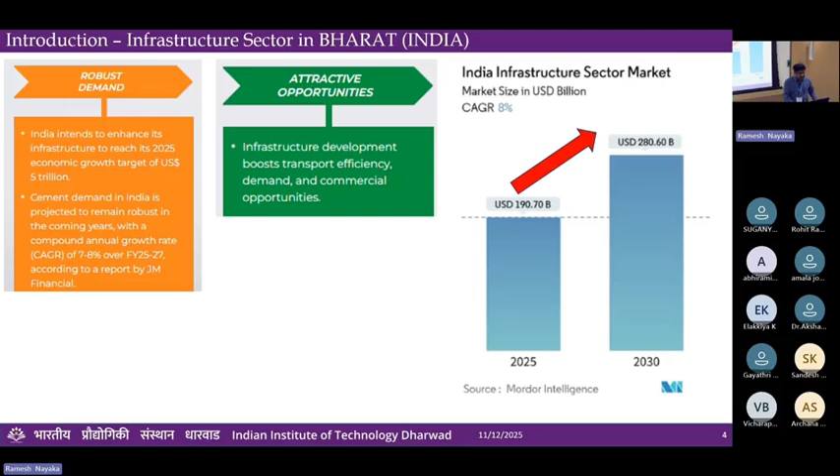Although the financial contribution or enhancement whichever is reserved, in order to meet that we need to have the kind of sources to build it. That is where it is reported by JM Financial that there are attractive opportunities. In order to build this, the government has just announced 3.1% of GDP to build the infrastructure.

So it is not just about reserving the financial support for building infrastructure, but on the other side, there are attractive opportunities to build the infrastructure, which could boost transport efficiency, essential for growth of any of our tier 1 cities, and also demand for commercial opportunities in tier 2 and tier 3 cities where we are looking for many commercial corridors.

For instance, if you talk about Mumbai-Pune, and Bangalore-Pune, and again we talk about Chennai-Bangalore, Hyderabad-Bangalore, there are many corridors which would be connecting or looking for commercial opportunities and need of this transport efficiency in order to connect business.

So that is the need again of infrastructure and policy support. As I mentioned about policy support, the union budget had reserved the fund, and likewise there is increasing investment. If you look at the other investors who would be investing in the infrastructure, their investment is increasing year over year.

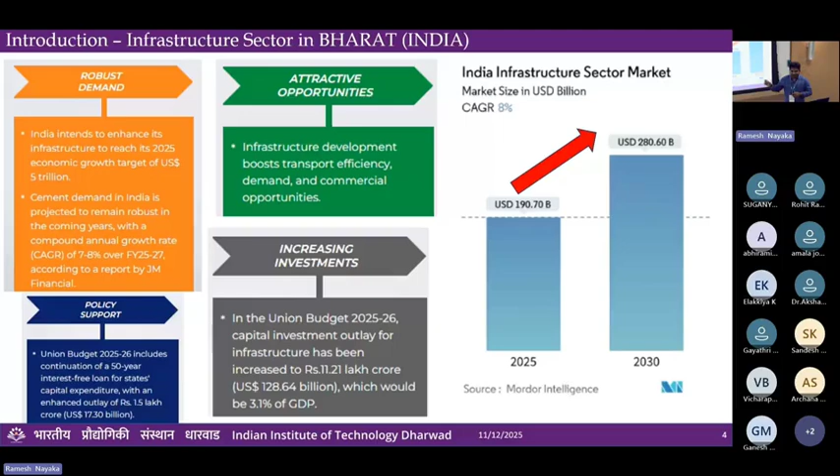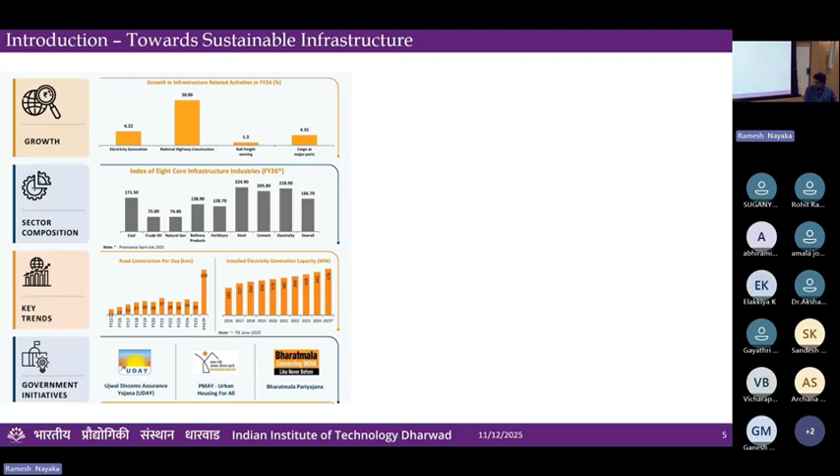So you'd see the trend showing road construction per day. Every day we would be noting, understanding the growth or trend going on in terms of construction. These are a couple of government initiatives also supporting meeting the infrastructure demand.

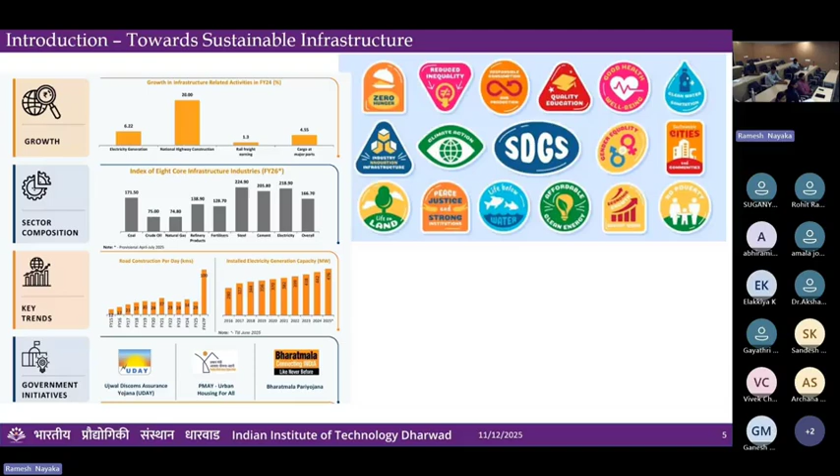On the contrary side, it is also important to understand sustainability. If you're talking about the sustainable development goals, these were established in 2016 from the Paris Summit. In the Paris Summit, 17 sustainable development goals were defined, and 192 nations are working towards achieving these sustainable development goals.

The important role in achieving the sustainable development goals, out of the 17 goals, you can see industry innovation and infrastructure. This is one area where we can think about contributing directly or indirectly. We can also contribute to sustainable cities, acting upon our implementation or looking at alternative sources for any demand, whether it's cement or any natural resources we traditionally use as construction materials, so we can overcome this.

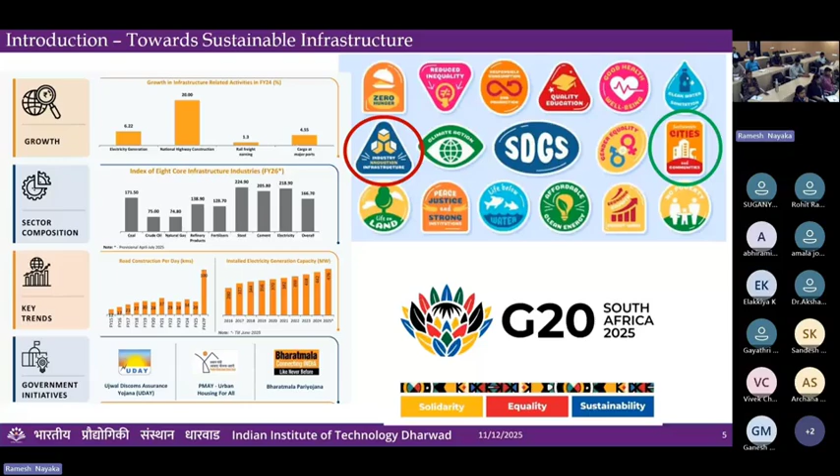This was again revisited and recited about achieving the sustainable development goals in G20, held at South Africa in 2025, where sustainability is one of the three pillars. We have other components, but as far as this theme is concerned, we will be focusing on sustainability. In this line, our research center would be working on most of the emerging technologies and also sustainable innovative materials.

One such thematic research I would like to present through today's session is introducing the current ongoing research on construction waste, converting those waste materials into innovative materials, and finally adapting the emerging technology of 3D printing to build 3D printable structures.

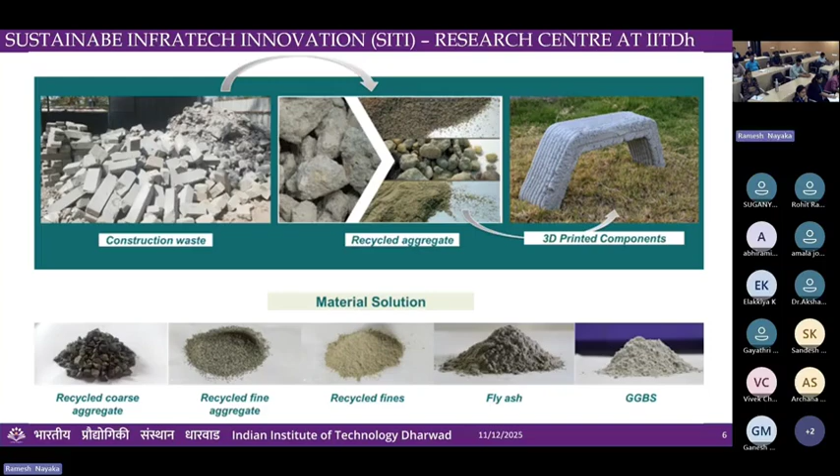Similarly, it is there from our roots about using our indigenous materials. Introducing these indigenous materials into 3D printing technology is another vertical we would be discussing as part of today's session.

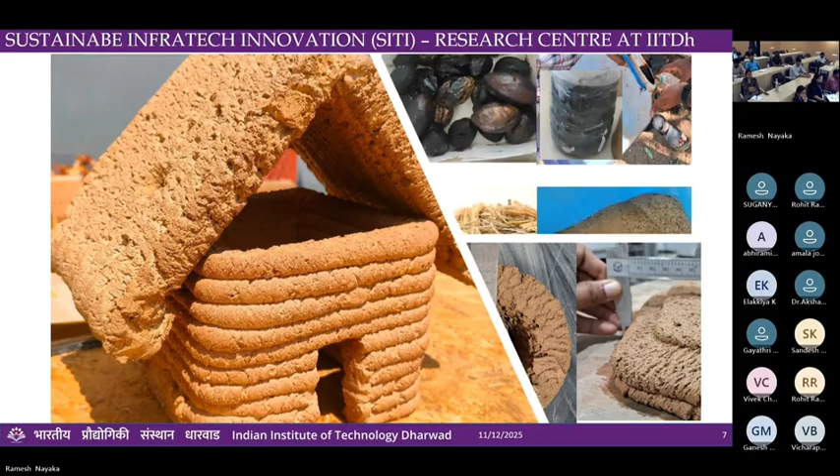So this is about the material. When you look at emerging technology, I just wanted to start with the introduction - how this technology is different from the existing technology, the so-called traditional construction techniques, our traditional construction practices. So what are the challenges we have in current traditional construction practices?

Can anybody name a few challenges we have been facing? Let's say our demand is increasing 8% year over year, that is a compounded annual growth rate. So what are the challenges we are facing? Why aren't we meeting the required demand?

Depleting natural resources, quality issues. Pardon? Time consumption for construction.

Yes, so again, the project time is the most important attribute towards meeting the demand. Anything else? Economic feasibility - when we talk about time, when you want to cut down the time, it comes with additional cost. So whether it is economically feasible or not is also important, and that is one of the current challenges in existing practices. Any other points you'd like to add?

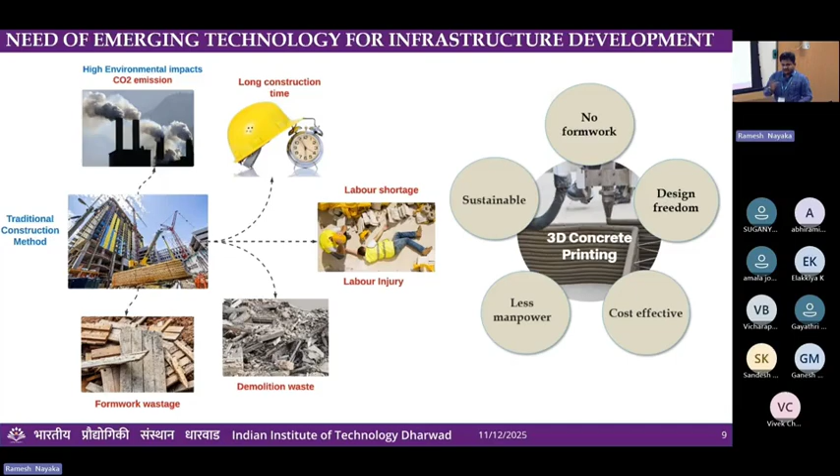I hope all of you know about 3D printing technology. By definition, this is an innovative construction technology which gives design freedom. Most of our typical construction practices are regular shapes, so if you want design freedom in construction, this is the most efficient and suitable technology using the method called 3D printing. This gives design freedom, faster construction rate, less waste, and also it would be cost effective in overall project cost.

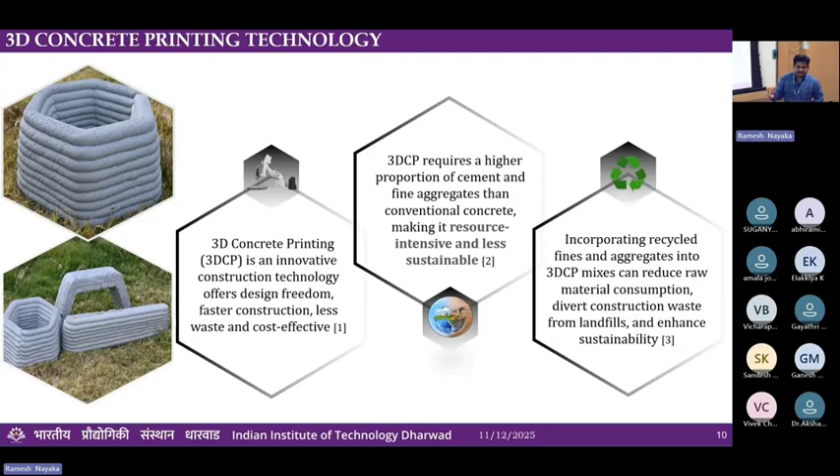This requires a higher proportion of cement and fine aggregate than conventional concrete, so that is where we always stand at the point and think this is not cost effective. But it's not essentially just about conventional concrete - when you look at other special concretes available in the market, when you are trying to design and meet the requirements of infrastructure, definitely this is more important when incorporating recycled construction waste or alternative industrial byproducts, so that you can overcome the intensive usage of cement and aggregates.

The types of printing technology or printers available in the market are extensively suitable for meeting infrastructure demand in construction. We have Gantry type 3D printers, which are extensively used in large scale 3D concrete printing to print any kind of structures.

We have robotic arm 3D printers, where you'd like to have more geometrical freedom - in such cases, to achieve architectural applications, the robotic arm printer would help you out. And where there is scarcity of land in cities, you can try to use printers called truck mounted 3D concrete printers, which allow you to go to the location and print, so it doesn't need the kind of space required in cases like gantry type.

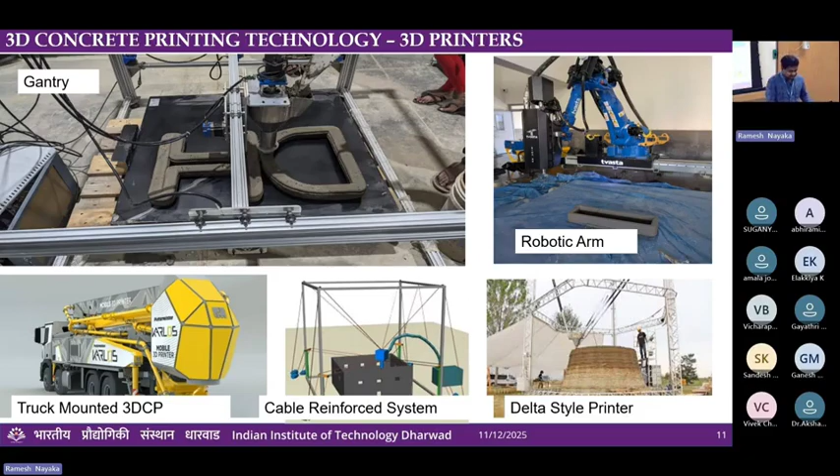We have cable reinforced systems and delta style printers. This is subject to the requirement or kind of applications where you'll be looking for design freedom, and you would also be expecting more freedom of access while printing the 3D concrete.

This technology involves these steps. The first and foremost, you develop the 3D model. I think we all civil engineers know that we have been using this kind of modeling. Earlier, like a decade ago, we just stuck to 2D. Now it's very common everywhere - we can see 3D. Even for small residential construction to large scale projects, we go with 3D.

But now, in order to make the 3D printable concretes, you develop a 3D model using various tools or software available to build 3D models. The most basic and most compatible one with 3D printing is SolidWorks.

So for concrete 3D printing, we have Rhinoceros 3D and Spherene. Fusion 360 also comes from Autodesk, which has more advantages for generating generative AI based 3D models. You just give the rough sketch of the typical model, and you can take advantage of generative AI to get more advancement in the model.

Once you develop this 3D model, the next platform required is slicing it into 2D layers. That is where you have Cura, Sperslicer, and other slicing tools which you can use for slicing the developed 3D models created using SolidWorks or similar software.

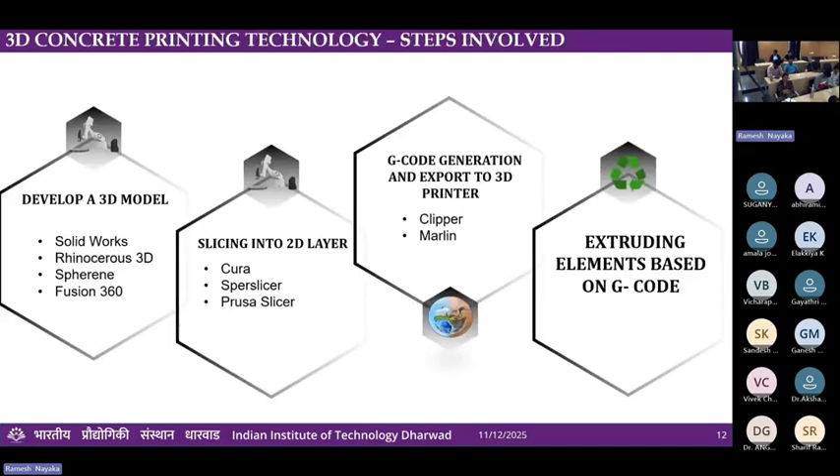So when we talk about it, we already prepared a mix, right? So when the mix is prepared, in the previous steps involved in 3D printing is extruding elements. So that is the second parameter mentioned in this slide - that is about extrudability.

So in any typical case where you are trying to manually print it, definitely you go for extrudability. So what is important in extrudability? Ease of flow, okay. It should be continuous and uniform layer formation because it's layer over layer deformation. So layer over layer formation, right, there should be ease of flow.

So what is the mechanism while you are building ease of flow in your concrete mixture? Admixtures - yes, those are the chemicals, but what is the basis? Where does the fundamental lie with this mixture? It should be homogeneous - it's all about concrete technology. But now we are going beyond concrete technology. Again, it lies with the basis of basic science of engineering. Bonding.

Okay, this is something about rheology, as you mentioned. So most of the things are connected with rheology. So what do you study in rheology? What is a rheological study?

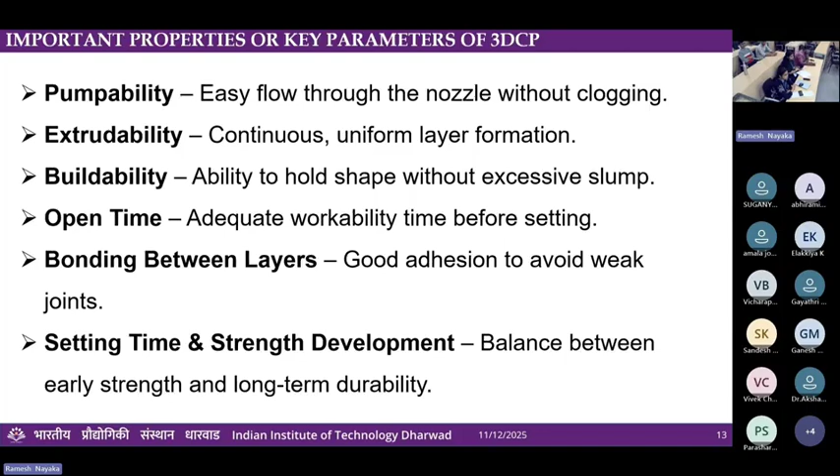So that extends to open time, then you have even bonding between layers, so setting time and strength development. So what I'm trying to discuss in today's session, because this is our theme of the GIAN course, is on characterization and numerical modeling of cementitious material. So in order to connect the previous sessions to today's session and the day after tomorrow's session, this is something to deal with the material properties itself, right?

So now one way is experimental investigation and another way is doing the characterization. But most of the things, we'll be dealing with the material either at the molecular structure level. So at the molecular structure level, by means of experimental investigation, you can understand the shape of the material, texture of the material, and the nature of the material.

All of these materials are important to achieve certain properties, so-called workability. But when you talk about 3D printing, it is something about achieving the rheology. So you should know about the rheological properties in order to understand.

As I mentioned earlier, rheology is not new for us. We have been using it every day, right? Some simple everyday ideas where you deal with rheology, from the morning you wake up and take up anything, either in the kitchen or in your bathroom cabinet.

So everywhere you witness this rheology, right? If you look in the kitchen, there are surface cleaning liquids. Are you okay with whatever surface cleaning liquid you use? You expect it more watery, or it should be kind of creamy, or something like a solid. What do you expect from this surface cleaning liquid? So it is thick, right?

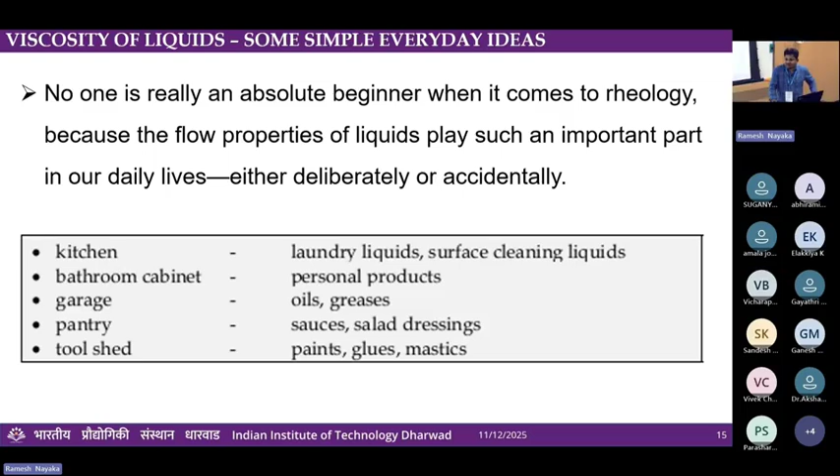So this is from everyday ideas—basically adjusting the rheology to meet consumer needs or demands, or for the technology to control the rheology for specific technical reasons. So we often look for high viscosity to resist the flow and low forces caused by gravity. This is where we'll be looking.

Is any rheometer suitable for the concrete mixture or even the cement mortar?

Rotation. Okay, so let's say you have bitumen, and you have bitumen and cement paste, cement mortar paste. So what is the difference between these two?

Bitumen and cement mortar paste fall under the same broad category, but the first classification is Newtonian or non-Newtonian fluids. Viscoelastic and viscoplastic we'll discuss later. What about petrol products? Those are Newtonian. So bitumen falls under Newtonian fluids, whereas cement mortar paste is non-Newtonian.

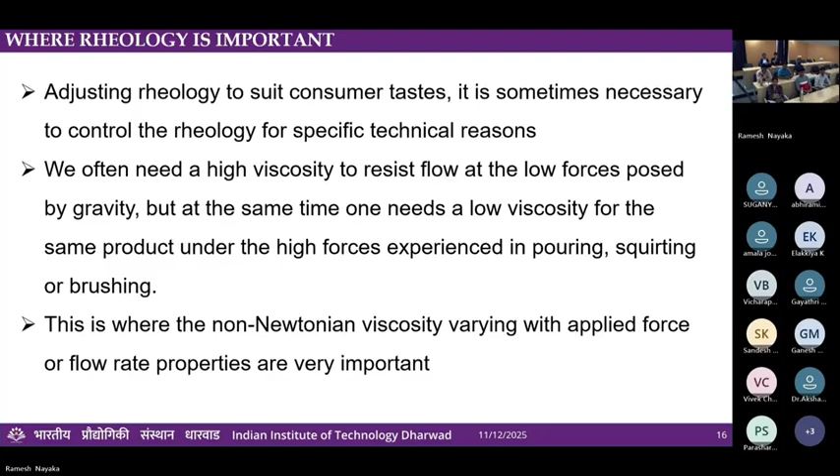But this is what you'll be looking at for non-Newtonian fluid. Then you will have this, called eta P, representing plastic viscosity. These are the examples I mentioned about rheology, like toothpaste.

Then you have thixotropic solid paints. These solids you convert, mixing with either solvents or water, to make it of required lubrication, or to make it more thicker, more thinner, or more creamy. Based on the requirements, you convert these solid paints to a liquid or fluid form.

Similarly, take the example of printing ink, which needs to spread easily. That's the major focus when squeezed onto the surface for transfer. But once it is deposited or printed onto the surface, in order to maintain its sharp edges as expected while writing, it must not spread due to the action of surface tension or gravity. So you need control over this surface tension and gravity.

You are preparing a mix such that, if due to gravity it starts spreading across, you definitely don't get the proper shape while printing the concrete mixture. So it's always subject to gravitational force, and you don't want your mix to change shape due to gravity. There should be retention against the gravitational forces. Also, if any forces develop from the bed surfaces, there should not be any reaction with surface tension. So your mix should retain its shape over the period while printing.

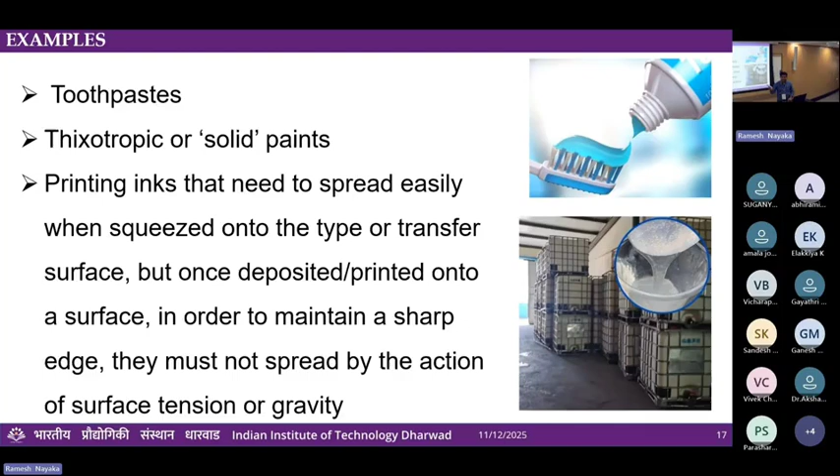And those properties should always ensure that it won't spread in any of these conditions. So maintaining it viscous enough to sit on any surface, whether sloping or flat, it should be viscous enough to sit on it, then it should not spread across.

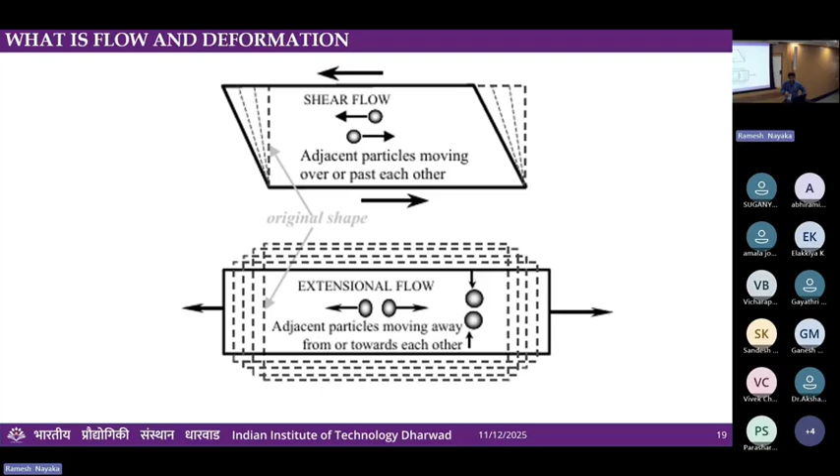When you look at the flow, there are two kinds of flows: one is shear flow, another is extensional flow. In shear flow, adjacent particles are moving over each other, so they pass each other - that is called shear flow. But in extensional flow, adjacent particles are moving away from or towards each other. These are the two phenomena you would see in the rheological properties of cement paste or even concrete.

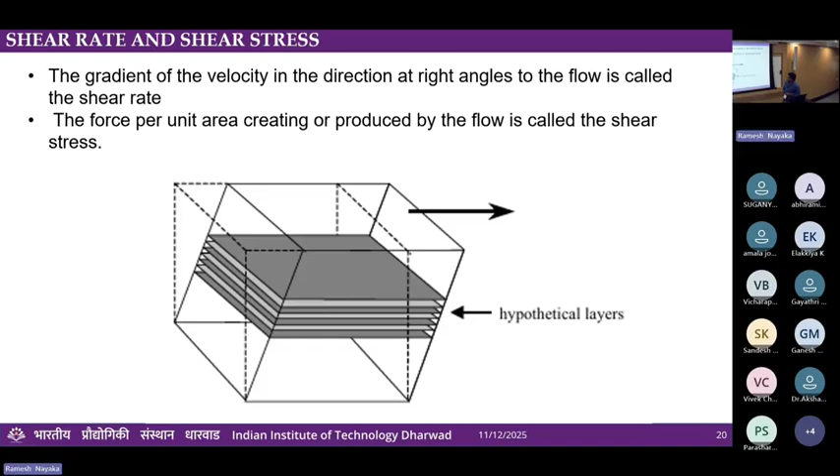In any situation involving sedimentation of fine powder in a liquid, the shear rate will range from 10 to the power of minus 6 to 10 to the power of minus 3. But when we talk about extruders, whether polymer or something with lubricating, mixing and stirring, that is where in the liquid manufacturing stages we expect the shear rate for our mixtures - 10 to the power of 1 to 10 to the power of 3 is the required shear rate.

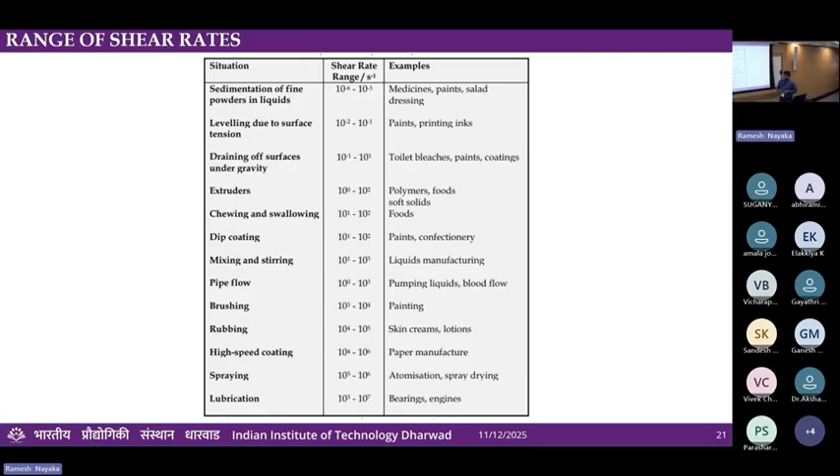Does anybody know the definition or understanding of thixotropy or shear thinning? By looking at these graphs, can you decide something about this? No, that's qualitative. But when you talk about quantitative terms - how viscosity decreases due to so and so - that affects it, we call it shear thinning. So in which cases do we call it thixotropy?

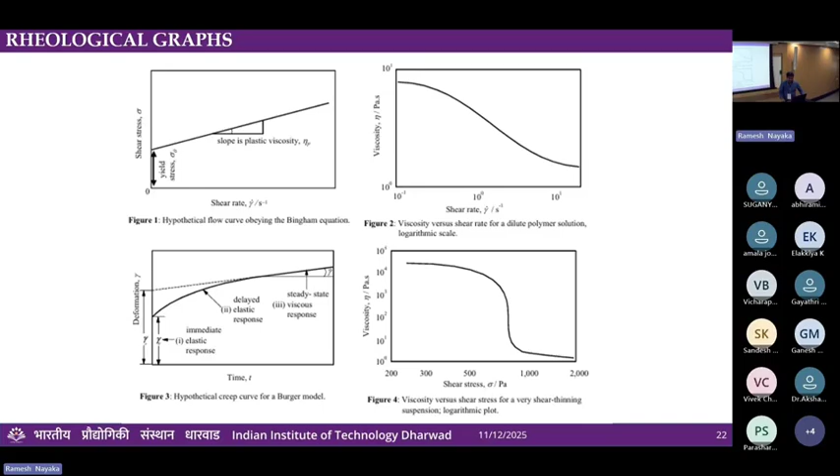If it is decreasing due to the shear stress, will we call this as a shear thinning? Or if it decreases due to the shear rate, will we call it as a thixotropy or the shear thinning? I think you would see this pattern, right? Something of this pattern. So thixotropy is decreasing the viscosity due to shearing effect, whereas shear thinning is decreasing the viscosity due to the shear rate. There are two cases, so you should be able to distinguish shear thinning and shear thixotropic effect.

And now, you just understand the fundamentals and background of the rheology, which is important for 3D printing technology. So overall, the 3D printing technology lies on the basis of rheological properties. So what you would do before and after is something about concrete technology, but in order to understand 3D printing technology, it is rheology. And obviously you do some tests, right? What all tests would you be performing to understand or determine the rheological properties?

Slump is again about concrete technology, it's not about rheological properties. So as I mentioned about viscosity, you set your viscosity to achieve the consistency, right? Or maintain the viscous nature by consistency, texture, and its shape. The fluid is flowing, but you want to maintain these properties: one is viscosity, consistency, and the texture.

What all tests do you perform? Anybody attempted? You perform a vane shear. So what do you understand from the vane shear? Do you apply shear rate over there in a vane shear? Yeah, what is that mechanism? Any response from the online participants? If you have anything to add, please add it.

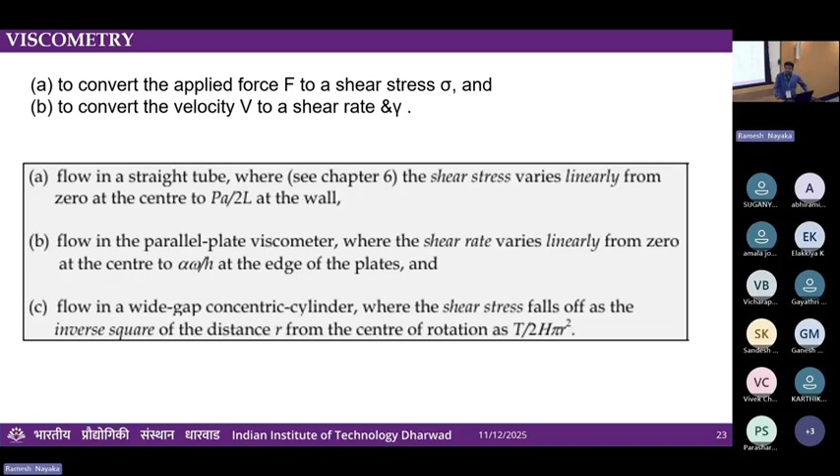So what are the important things while performing the test? Either you use a rheometer or a vane shear test, but you should notice some important things to make sure that whatever experiments you conduct in order to measure viscosity, by means of viscometry, are done properly.

So you should do the calibration. How do you perform the calibration for a rheometer? Have you done calibration for a rheometer? How do you calibrate the rheometer? They give a known fluid for any kind of setup, because that's a standard sample we'd use, so that we don't have much variation in any case. We apply this same approach in many other mechanisms.

So you use known fluids to check whether it gives the pattern that the known fluid should behave in. Once you assure that, then you take up your samples to test. First of all, you should make sure of the calibration. Once you make sure the calibration, there could be something called artifacts - there should be error, so you have to rectify it. In the known fluid, although the standard fluid is known, there could be some error of your system - that's called artifacts. Any zero or any errors, you should mitigate those before you perform the rheometer test. Then there is something called the wall effect.

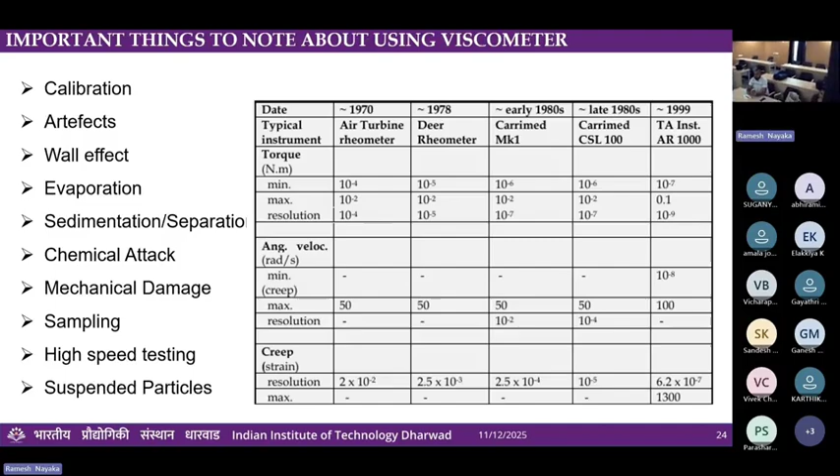So these are maybe different types of tests that have been adapted over the years. And further, if you look at the kind of models available for performing this rheo property testing, one you have from Brookfield, and then you have from Rheometrics, RM 180, 265. There are many others - Reologica, ViscoCheck - these are different models available in the market in order to perform this viscometry.

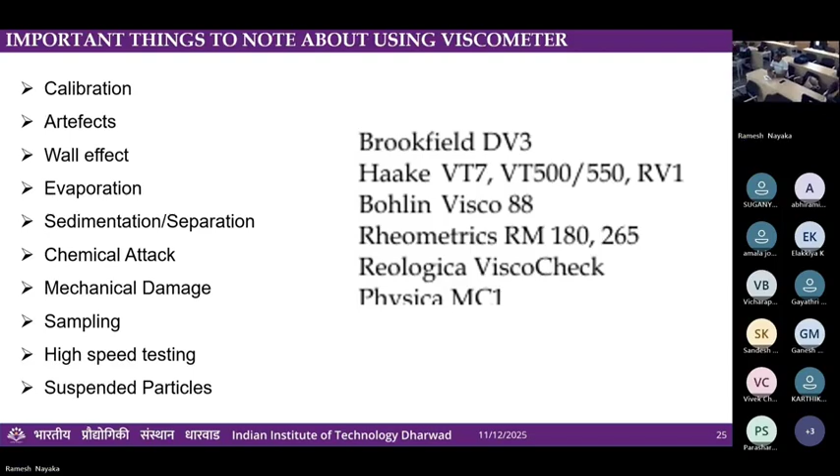For concrete, the most suitable equation is the Bingham equation. So adapting this equation, you would be trying to perform the test and relating, developing your graphs with respect to this equation. And by defining sigma y as the yield stress, the point at which you get the yield stress - from that point, it starts behaving as shear stress against shear rate in a linear form. And finally, you would be getting the plastic viscosity.

So at a reasonable range, there should be proper shear rates and shear stresses, which fit well with the linear equation or linear function of the shear rate. And whichever is displaced upwards by a constant value is called the yield stress.

So this is all about fundamentals and the basic science required for going with 3D printing technology as far as this GIAN program team is concerned. So now, further, going with some case studies of the work that has been done. Yeah,

that is something dealing with polymers, not with cement 3D concrete printing. So again, when you talk about polymer, you should be very clear with the kind of fluid it is. Whatever we talk about as Newtonian, it is subject to changes in temperature and pressure, so it changes its property. Otherwise, there is a linear, constant nature of the value.

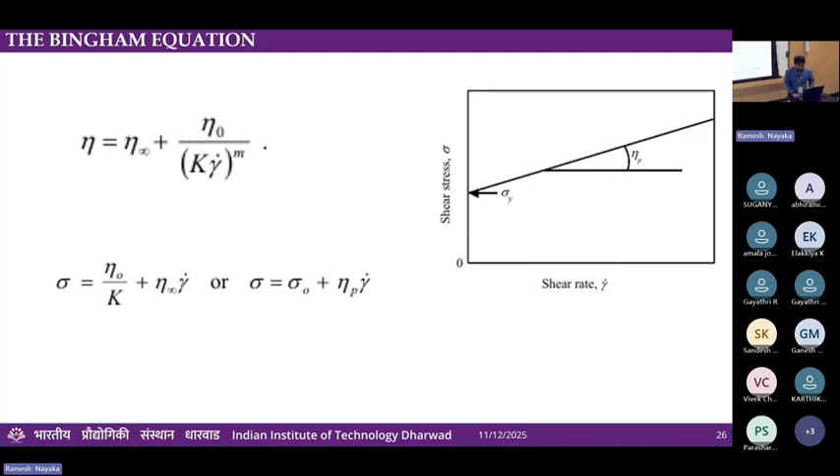So just to go through the case study, based on our understanding of this: this was done by the team using construction waste. They generated the waste, then processed it, and finally got recycled fines and coarse aggregate.

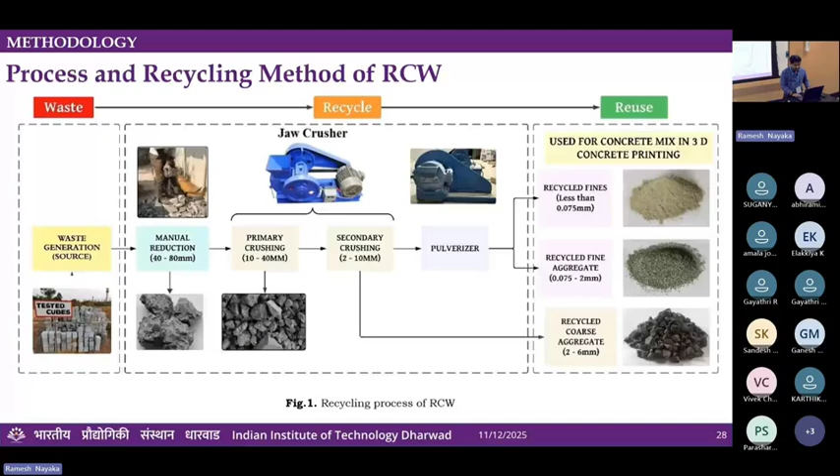So you have done a kind of modeling or iteration process for ordinary Portland cement, fly ash, and GGBS. But the main crux of this case study is using recycled fines and investigating those properties.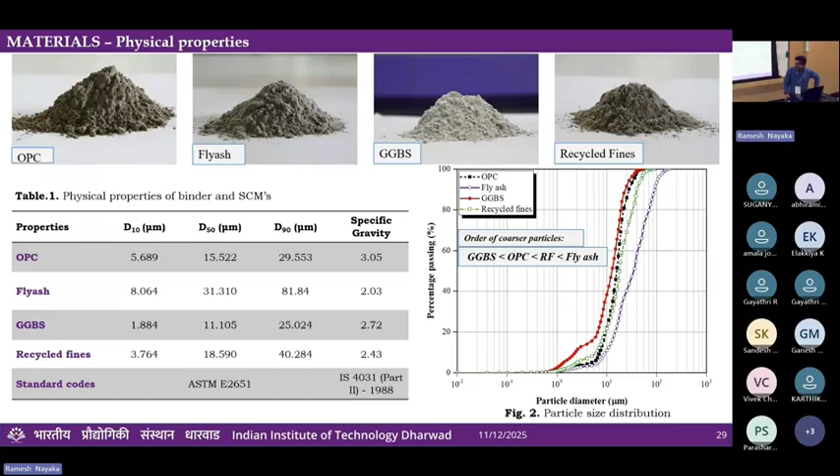Let's say if you talk about limestone as a raw material - when you look at the geographical deposition of limestone, somewhere it is rich in magnesium oxide. But in cement manufacturing, we limit the magnesium oxide up to 6%. So in such cases, you alter the overall manufacturing process in order to produce the clinkers.

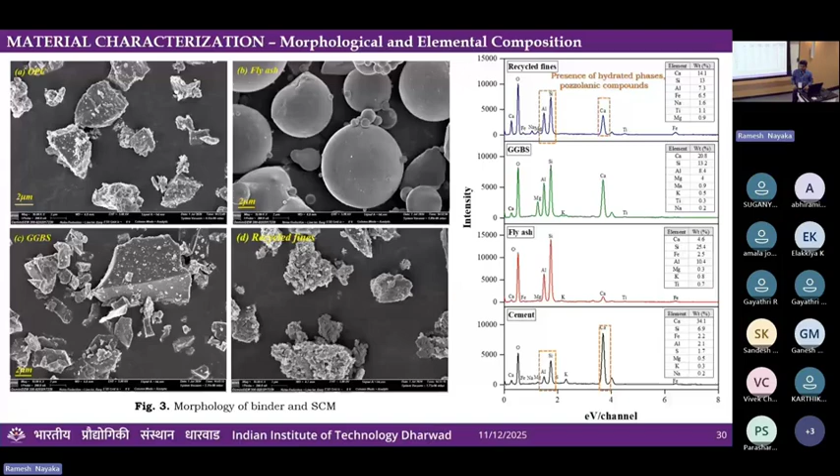So that is the kind of insight you get from EDS, and also from XRD analysis. And XRF is the kind of test I mentioned for different oxide compositions - you can understand this from another demonstration session on XRF.

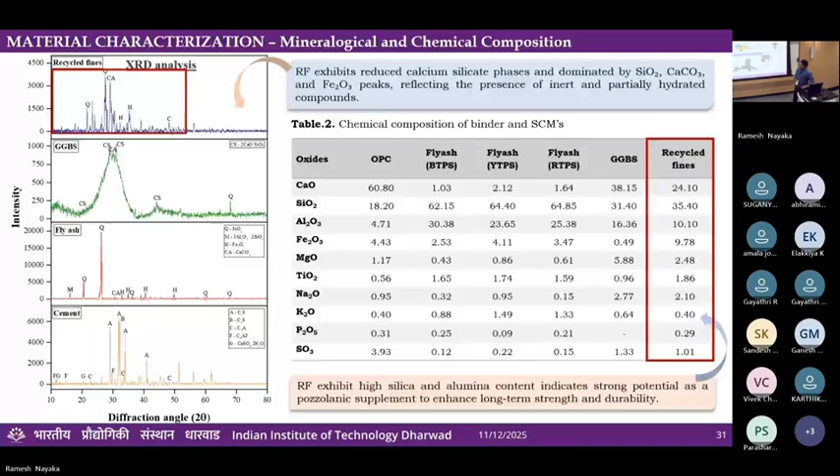So the significant findings from this - this is just on material properties, but what I would like to give more understanding on is the rheological properties and their behavior in 3D printing.

So again, you use fine and coarse aggregates as the replacement - recycled construction waste as recycled fine aggregate and coarse aggregate. This is as per the standard - you test it and make sure it falls within the limits specified by the standards to use it as fine and coarse aggregates.

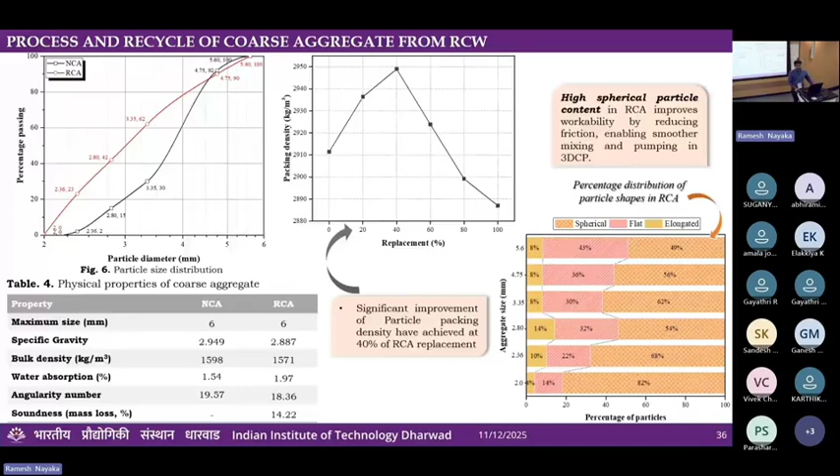Similarly, this is for coarse aggregate and heat of hydration - that connects back from the very first day's session. How do you test it for ordinary Portland cement versus other percentages of replacement with recycled fines, and whether it changes the behavior of heat of hydration? So depending on whether you want low heat of hydration or high heat of hydration, you can set the concrete accordingly.

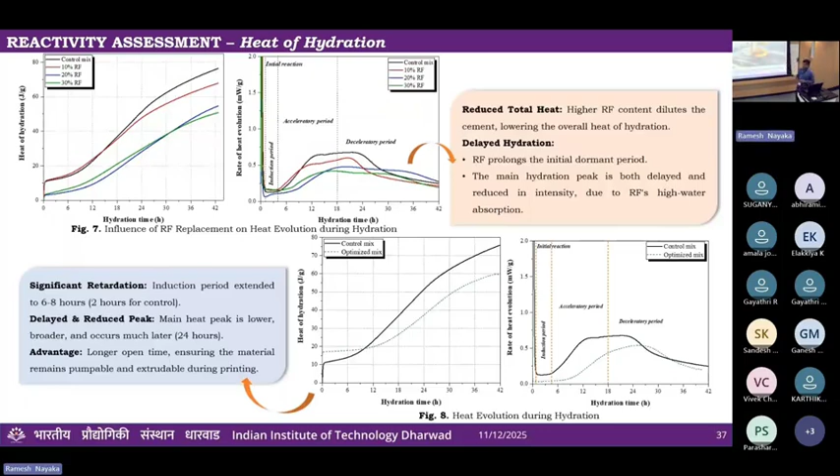Since it is extruding and continuous, it is meeting its viscous properties. But over a period, once it's extruded, consistency is important. You could understand consistency when it goes from one layer to the other layer. If it's not consistent, the bottom layer will deform while the top layer maintains its sharpness, meaning its shape retention. That is what we mean by consistency.

Lastly, about texture. Since it behaves like a fluid in nature, it's supposed to give a smooth texture. If there are any cracks or small pores existing, then the texture still needs to be improved. That is how you can understand the rheological properties.

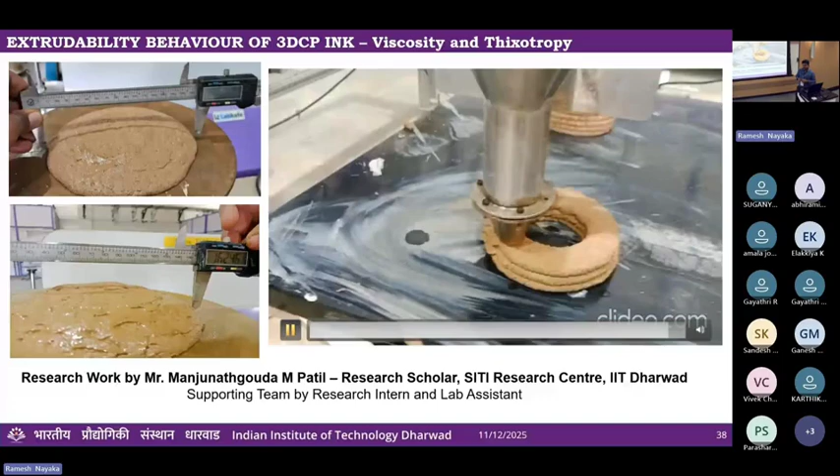There are ranges for this because, as you may have heard, 3D concrete printing does not use coarse aggregate. Unlike conventional mixes where we use 20mm size aggregate, there are limitations on the size of aggregates used. The best suited mixture is the cement mortar mixture. If you want to further improve it, you do a trial and error method again to achieve the rheological properties. When you go for larger size particles, you require a higher shear rate.

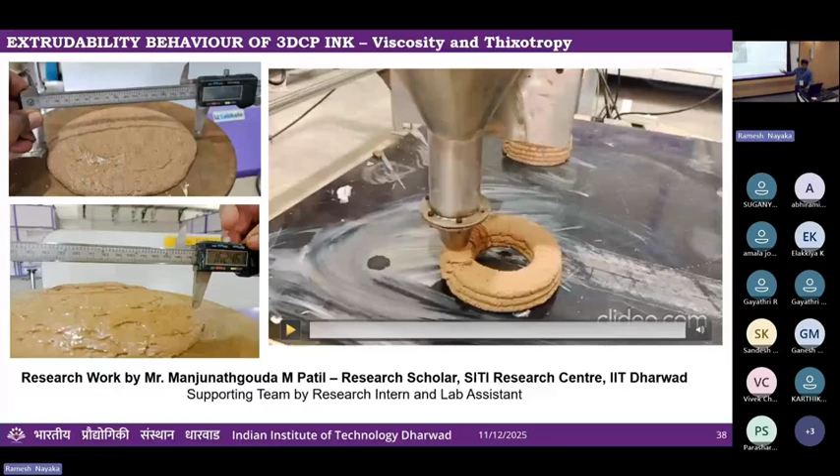When higher shear rate is required, it's not just about your mixture—it's also important to consider your whole system: the pumping system, the motor system you would be using, and the force you apply. When you apply force, velocity also plays an important role. When you're able to control the force and velocity with your mixtures, you can work with any size of aggregate. But that's most importantly where you face challenges.

In order to improve or go with larger particle sizes, you always have to achieve the rheological properties first. You don't need to go for printing at the first instant—you do a trial with the rheological properties. Once you're able to achieve that viscosity, consistency, and texture, then you go and do a trial with printing. Before that, it's not necessary to go for printing.

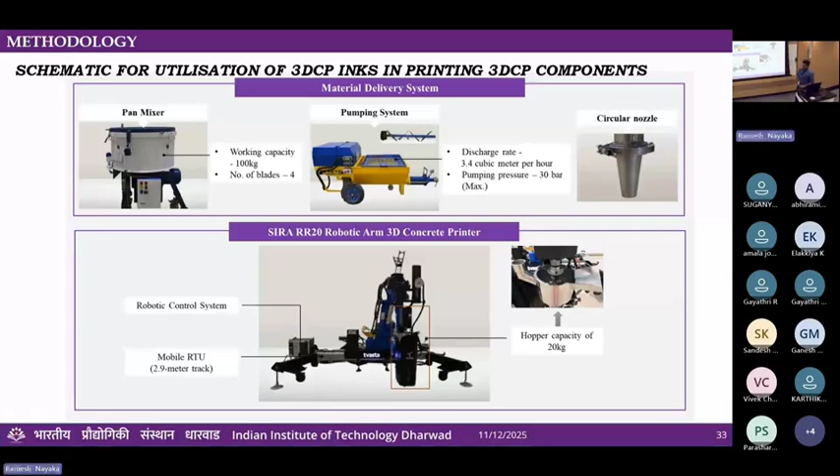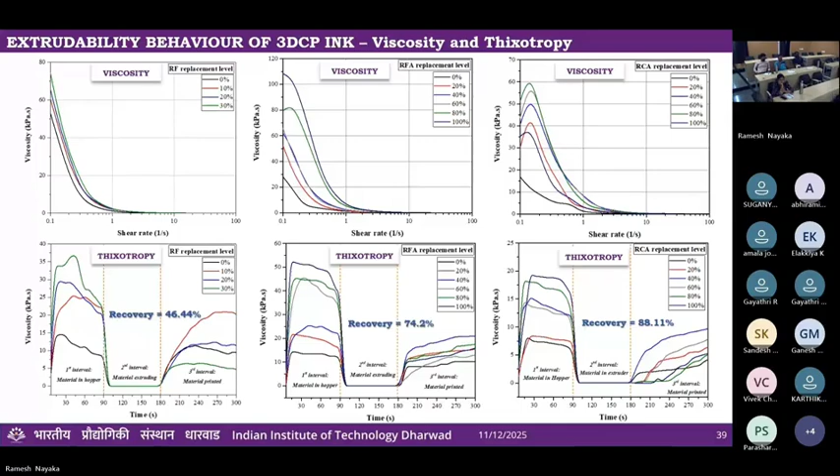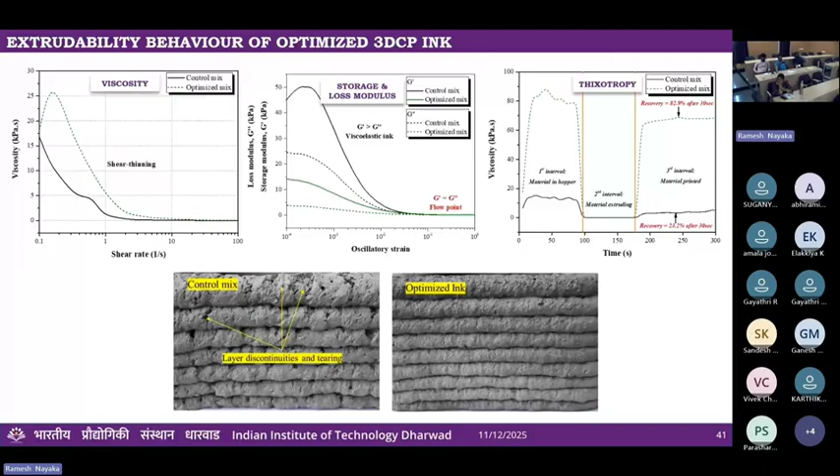This is something further. Once you've executed the extrudable properties, then you look at printability and buildability of the 3DCP ink. Again, the very first tests we performed are yield stress and open time. For layer-over-layer printing, once it's not able to resist the load, you notice buckling, which is deformation of the material due to changes in the value of yield stress. So you get deformations. Finally, the best achieved buildability is up to 540 mm.

So this is printability trials where you can notice for the mixtures, and here also you can relate with the rheological properties and how it is connected.

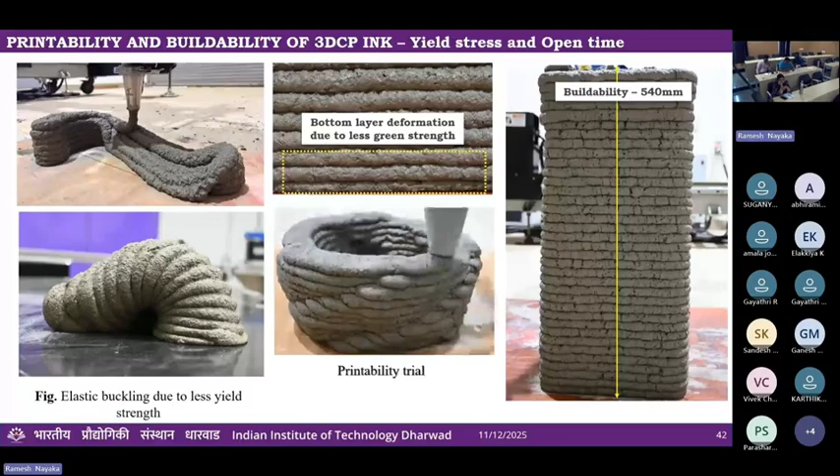And then you have control mix and optimized mix with the normal concrete, and then the recycled construction waste based concrete mixture with a structural recovery rate percentage has been compared with these two mixtures.

So here you could understand the texture, which is not enhanced. Again, there are admixtures or essentials to improve the texture. You add that, try with the rheological properties. Once you achieve the rheological property, you go for the printing.

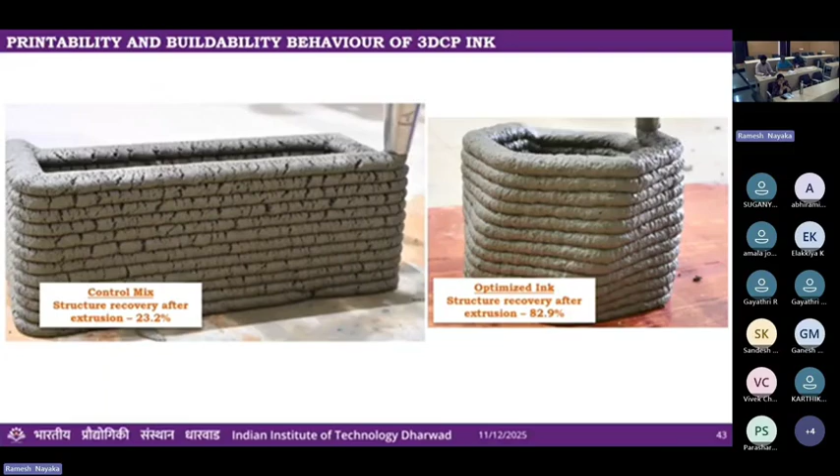This is further investigation carried out to understand and optimize the stability behavior of 3D printed structures. Using this framework, a numerical analysis to understand the behavior of 3D printable mixes using the finite element method. You have the 3D model here.

As I mentioned, it uses Rhinoceros 8. Then in Grasshopper, you develop the required inputs, connect it and assign the respective properties. And finally you can perform the analysis in Abaqus.

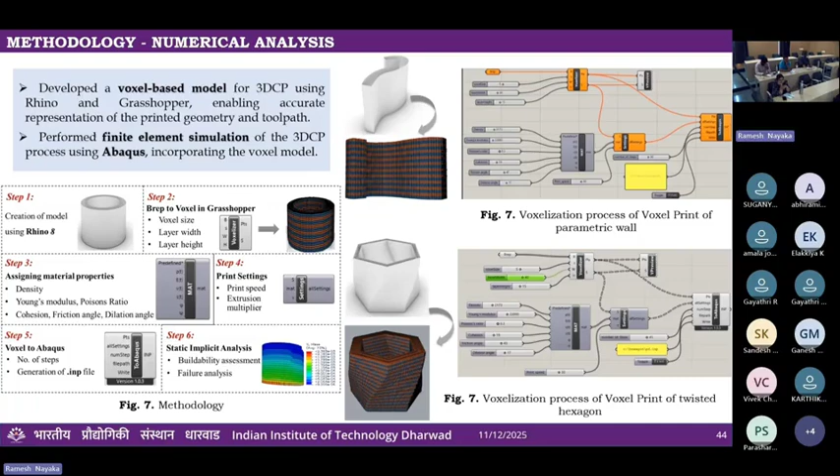So going with the static implicit analysis in this case, but there are other ways, like trying with vibration control when dealing with dynamic analysis. So this is a typical framework where you can perform the test and understand the printing behavior, which will help you validate your 3D printed concrete and structures to scale it up for large scale.

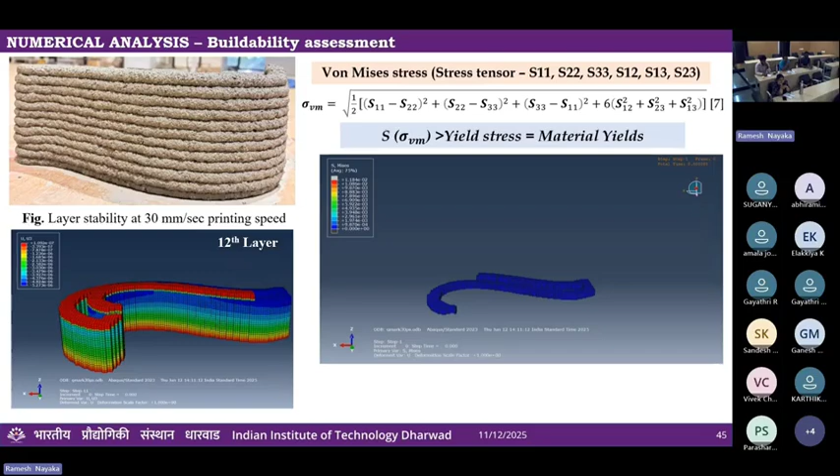So these are like the buildability assessment, and finally, in a conventional way, you would be investigating to understand the mechanical properties, which you would do for any type of concrete, investigating the compressive strength, and comparing those results with a non-destructive analysis, so-called UPV.

And again, we have done both the methods. One is for cubes, and another one is for extracting the 3D printed structures, and we tested on both methods.

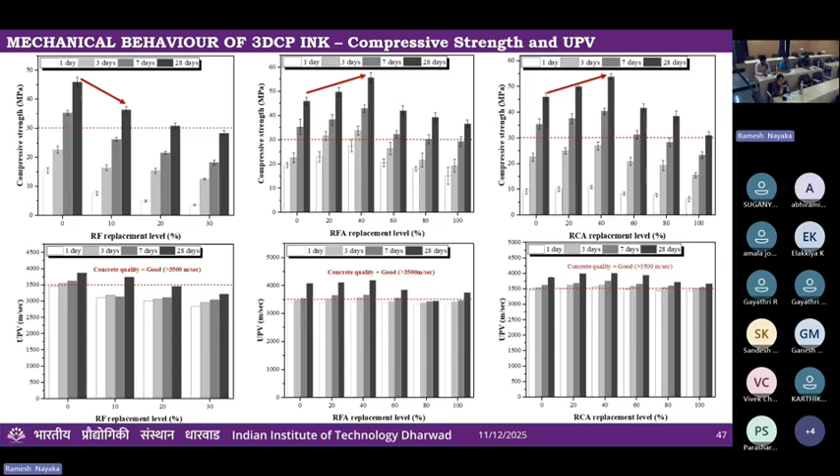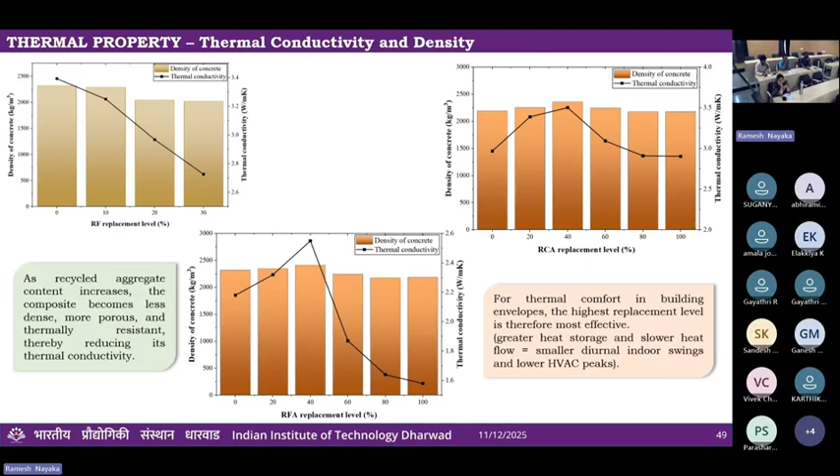We also performed a life cycle assessment of this product, because even though this is not very relevant to this theme of the GIAN program, to make its contribution to sustainability, we felt it was essential to perform this sustainability assessment.

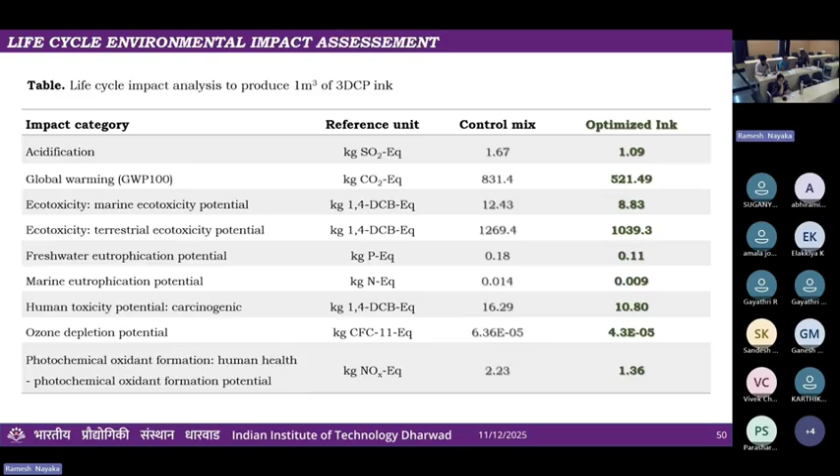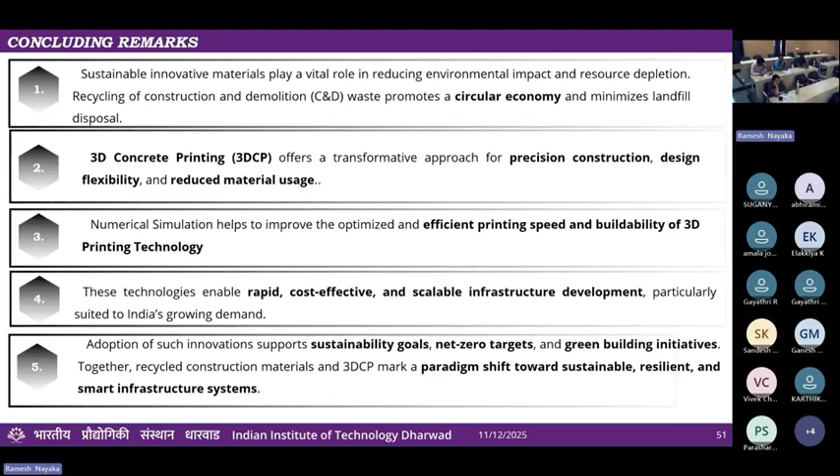So these are the concluding remarks on the technology of coming up with innovative construction materials. Emerging technologies will reduce environmental impact and improve all of these properties. These are some references. Thank you.

Is my phone... Yeah, if you have questions, I'd be happy to take up the questions and answer. So, is the time now?

So the strength, obviously, the cube will give a better strength as compared to the printed one. So the material properties, when you apply the compressive force, it is still able to withstand the force up to whatever we designed for, M40 MPa.

So the problem here is the compressive strength is okay, but when you apply force perpendicular and parallel to the layer, it is subjected to the interlayer bonding. So that test is still under trials. We have been investigating that and trying to improve those properties.

Because it is always subjected to, when you apply the load, some kind of texture appearance, what you have seen, some kind of crumbs, right? So they will form the weaker zones. So obviously you would never expect it to achieve better strength than the prepared cubes.